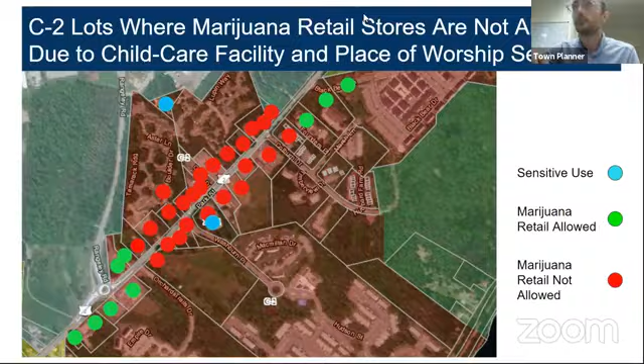Anybody else have questions for Kyle? Kyle, I have a question going back to what Laura was pointing out about that trail over by the Ave. That's university land, correct? So if we look at the 1,000-foot setback, that eliminates those three options down the far Park Street side, correct? So everything would be pretty much out.

Well, it would depend on how you defined it, whether you wanted it to apply to all entrances, a setback from any entrance to campus, whether it's a road or a path. If so, it would probably result in a good chunk of the lots not being eligible, especially combined with the other setbacks from the childcare and the Islamic Center. If you had Rangeley on this side and the path on this side, with the childcare and Islamic Center in between, there wouldn't be a lot of opportunity. But this is all up for discussion, and it's your decision at the end.

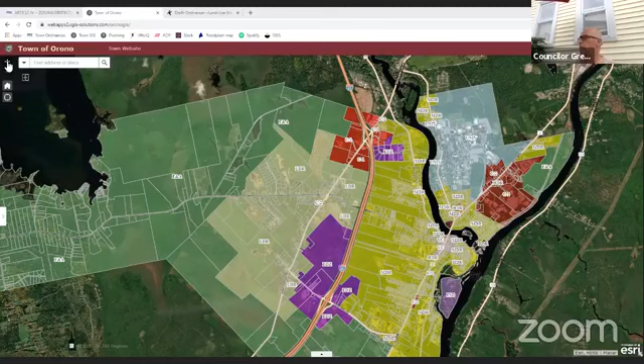Can you see a map? Okay, yes. I've never done the screen sharing with 2 monitors before, so...

So you can see there the beige coloring, which is the low density district. Stillwater Ave is a big corridor that runs through, and it also goes out towards the Forest and Agriculture District along Forest Ave. It turns into the Commercial 1 district as you get towards the shopping center and things like that. It pretty much stays low density residential almost until you get to the town line moving into Bangor.

So that's generally a larger district, worth mentioning. The low density district has fairly large lots, a minimum lot size of 60,000 square feet. So while there are some single family home residential subdivisions in the low density district, they are larger lots than you'd find in the MDR district, for instance.

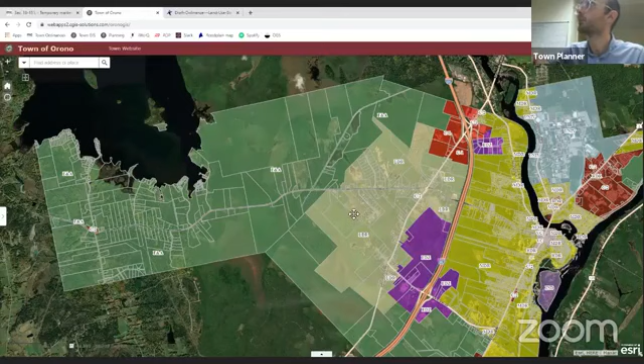To zoom out pretty far to get the whole forest and agriculture district there. But the forest and agriculture district is all the green, so primarily the area west of the interstate, as you get away from the low density district and move out towards the lake. There's a lot of large parcels that are undeveloped and will probably continue to be undeveloped in the forest and agriculture district, but you do get some more residential properties as you move out towards the lake. And then our C1 district, you can kind of see here, which is the area around the interstate exit on Stillwater Ave.

Any other questions, Kyle? The nurseries, would they require all the ventilation? Because that's not really an odor issue when the plants haven't matured. So do they have regulations around those kinds of things as well?

I'm not sure exactly what the state law requires them to submit. I imagine at the very least they'd have to have some sort of plan in place that states they're not going to have any odors go past the property line. It might not be as strict as specifying certain ventilation technologies be used to mitigate it. It might be more so just stating that you won't create an odor issue. But I do think the concerns would probably be less than one of these 5,000 to 7,000 square foot cultivation operations with all mature plants and things like that. It's primarily a greenhouse that might sell gardening supplies.

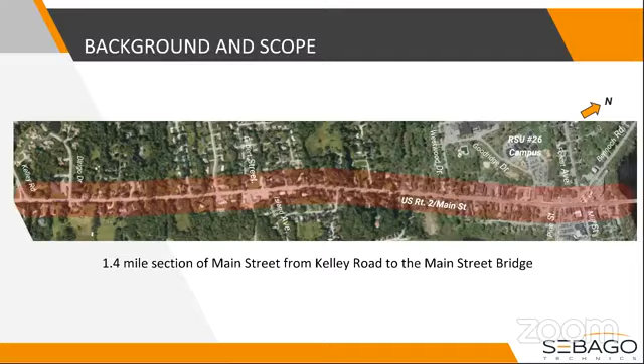So to start, a little background on the project. This really started back in 2017 through a downtown traffic and circulation study that Sebago Technics was commissioned by the town to do at the time. It's important to note that this study really just looked at the downtown area. If you look back at this previous graphic, the downtown study went from Westwood Drive through the signals and didn't look at a majority of this corridor, but it was still an important planning study, and a lot of recommendations came out of it that we tried to incorporate into this project.

Within that study, a number of items were determined, some short-term to medium-term recommendations, and a few long-term considerations. A couple of items I want to focus on: some key elements include a reduction of the travel lanes. What you have out there today is right around 12 feet. Reduction of the travel lanes to 11 feet, and in some immediate areas 10.5 feet, mostly in the downtown area, was what was recommended. The reason for that is twofold.

It's traffic calming and also to try to provide some more space for bicyclists. Moving through the list, there were some minor adjustments recommended for the main Pine Street traffic signal. A big focus, you'll hear me talk a lot about this tonight, is location of crosswalks—both consolidating crosswalks where appropriate, in some cases eliminating them, but more important than either of those elements is really careful consideration of where crosswalks are going to be placed.

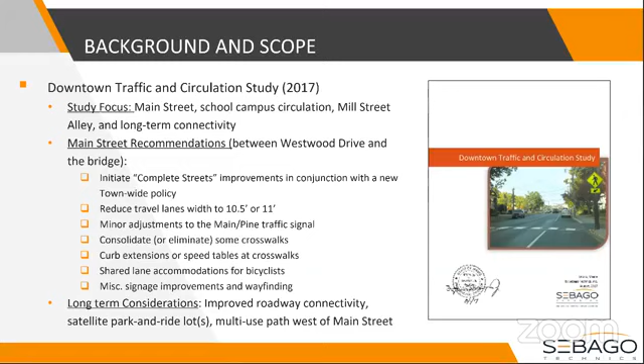What dovetails nicely into crosswalks, in addition to the placement of them, is the treatment of them. So there was a lot of discussion in this study about curb extensions, speed tables to slow down traffic, and also center median islands for refuge areas. Again, accommodation for bicyclists, and various wayfinding and signage to improve notification to motorists of crosswalks and bicycle facilities.

Another important study done in the past, in addition to that downtown planning study, is the Heads Up campaign, a partnership between Maine DOT and BCM, the Bicycle Coalition of Maine. This study started in 2017 and finished up this year, involving 21 communities, including Orono, which we're discussing today. The focus of that campaign was to do a planning exercise for the region as a whole, hold public meetings, and collect data. Other elements included looking at infrastructure improvements needed for the region and developing programs focused both on education and on enforcement.

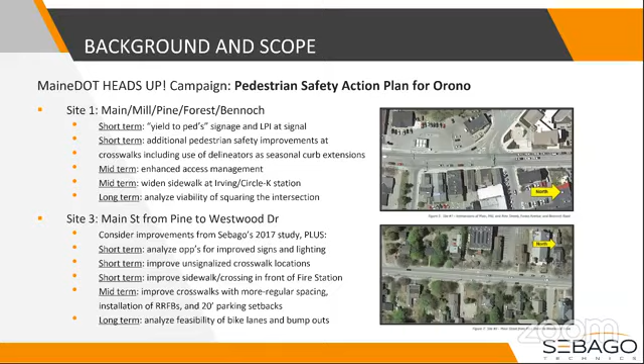So given that background, I'd like to just dive into kind of what we've done to date, and go into the project in a little more detail.

Sebago Technics was competitively selected by the town of Orono, just to set the stage, to really look at some of these options that were recommended, both in the previous planning study, the Heads Up program, among some other materials that were available to us, and allowed us to really kind of look at transforming this corridor. And again, really to look at multimodal focus, multimodal being, you know, I talked a lot about pedestrians, bicyclists,

but also transit in some cases, looking at are there opportunities to provide additional bus stops, opportunities to move bus stops to a safer location, where those bus stops are located, provided safe crossings where those buses are dropping off so people can get from one side of the street to the other. And really looked at the feasibility of implementing these various improvements.

So even given all this information at hand through these previous studies, we found it was really incredibly important to note that Sebago did not perform this work in a vacuum. Yes, Sebago was kind of involved with the 2017 study, but to the town's credit and Rob's group, he encouraged us to kind of interface with the advisory committee.

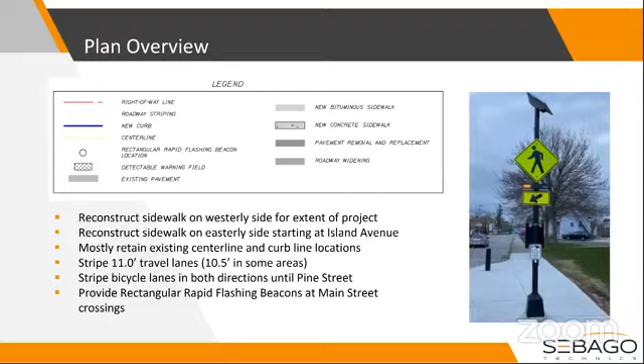What you're looking at here is the overall master plan. This isn't what we're proposing to build day one, but it's the overall vision for the corridor, so it's important you understand the overall context. We're starting at the southerly end of Main Street, with Kelly Road to the left, working right as we go north up Main Street.

Some elements to be aware of: we're proposing to widen Main Street by a couple feet to provide a bike lane between the through and right turn lanes, which transitions to a dedicated bike lane north around Dirigo Drive. Honestly, once you get through the signal that bike lane leads to nowhere, but there's a sizable shoulder there. There's space, but we have to draw the limits somewhere, so there's a dedicated bike lane between those travel lanes.

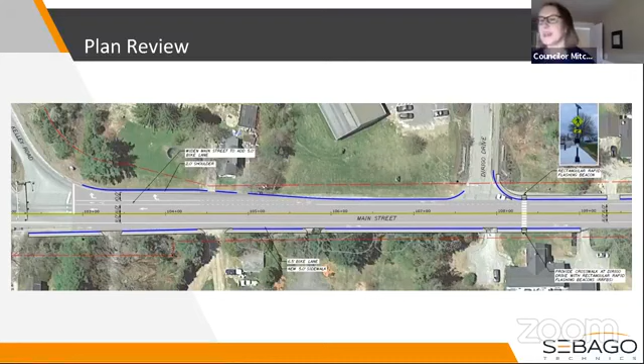I mean, there was a lot of discussion around it, whether you provide sidewalk or not, what side of the road does it go on. There was a lot of back and forth, and we had a lot of differing opinions, certainly at the advisory committee level.

Brad, to also add to that, I do know of a couple people who live in Dirigo Pines that walk up to the country club to eat there, and they have concerns about walking to get to the country club because it's so close to them to eat. Sure.

Thank you. You're welcome. The graphic's not great, but again, all crosswalks, as I referenced on the previous slide, would be treated with rectangular rapid flashing beacons, to draw attention to that crosswalk location, if that was to move forward. But like Rob mentioned, that's not part of the phase one plan.

So moving northerly, vicinity of Willow Ave, not a lot to talk about in this area, to be honest. It's a pretty typical section, downsizing the travel lanes from 12 to 11, with reconstructed sidewalk on the westerly side of the road, if you can see that. That blue line represents that slip form concrete I spoke of.

I think that's pretty much it. Dedicated bike lane, it's important to note, obviously continues through the corridor, defined 5 feet in width, heading southbound. And northbound, since we've kind of lost that sidewalk at Dirigo through that crosswalk, we're not continuing a sidewalk on the easterly side. So your conditions there are basically as they exist today, you're really just talking about striping. Which in turn, if you have a defined 11-foot travel lane, you've got a variable width bike lane, but we've ensured that that's 5 feet minimum.

This is where it starts to get a little interesting. Continuing up to Gilbert Street, the cross section's exactly the same, 11-foot travel lanes. The bike lane gets a little bit wider, 5.5 feet, but for all intents and purposes, dedicated bike lanes both directions, with reconstructed sidewalk on the westerly side.

We had a lot of talk about this. In the area of Gilbert Street, I'm sure you guys are familiar with this. There was a lot of talk about providing a crosswalk somewhere on this corridor, and a lot of need identified for it. We looked at providing a crosswalk not at the intersection of Gilbert, but moving it towards Island Ave. The concern there, for those of you familiar with the road, is you have a pretty significant crest curve, a vertical curve in the road that has the potential to restrict sight distance. So that did not seem like a great location to put a crosswalk across Main Street, which is what's the driver for it being at Gilbert Street. That's why it's located where it is.

The other element of note where you see a lot of line work happening is in the area of this convenience store. For those familiar, that's kind of a sea of pavement. So one of the recommendations that came out, mostly from the Heads Up program but also talked about at the advisory committee level, was the need for access management in this area. This will involve Rob and the town of Orono communicating with the property owner to see what's possible here. But from a traffic engineering perspective, especially given the location of these side streets, it seems like a pretty dangerous condition, not only for vehicles going in and out of the convenience store, but also for pedestrians who choose to walk here.

So Island Ave is kind of cut off, to my left. Continuing to the north, the curb line is being pushed towards the center line a little bit, so the new sidewalk is being constructed on the easterly side of the road. By pushing towards the center line, the width of Main Street curb to curb gets a little narrower. The benefit from that is both from a traffic calming standpoint and it provides a little more pedestrian space if needed. But again, 11-foot travel lanes, which are 100% within standard, with dedicated striped bike lanes in either direction.

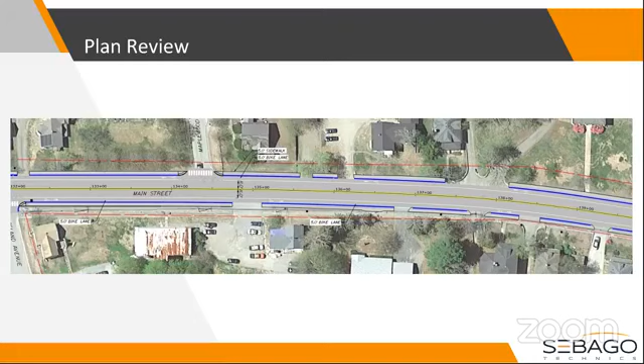Moving to the north, you start to see we have a lot of width available here, just the existing curb to curb. So there were a number of options we looked at in this area. Number one was to consider continuing the cross section I spoke of earlier with 11-foot travel lanes and a 5-foot bike lane. Doing that would involve pulling the curb again towards the road and narrowing it, which proved to be pretty cost prohibitive, both from a construction standpoint and mostly from a drainage perspective. So we thought there was a benefit in changing the striping a little bit, since striping is pretty cheap in the grand scheme of things, and providing a dedicated 2-foot buffer. So that bike lane is really about 7 feet from the fog line, or edge of travel way, to the curb line, with that buffer there to try to separate bicyclists from moving vehicles.

You'll also see another element of note on the easterly side of Main Street as you get towards Spencer Street. The sidewalk gets a little wider, about 8 feet wide. And then we are proposing another crosswalk, similar treatment with an RRFB, in the vicinity of Spencer Street.

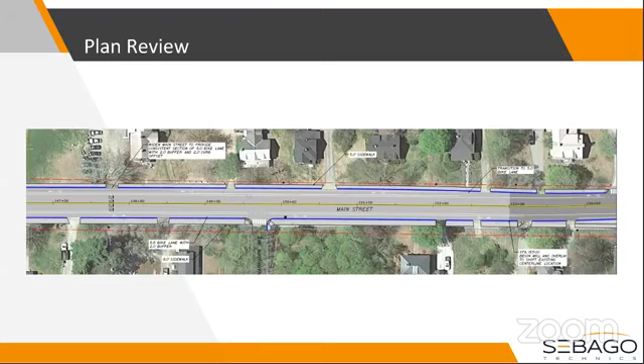Again, similar cross section, nothing to really talk about here - 2-foot buffer, 5-foot bike lanes. You start to see, and probably the next slide is a little better representation of this, around station 153, where that gray gets a little darker. That's where we're proposing a mill and overlay. All of these treatments, and what we're proposing from this area south, is that the core of the road really is not going to be repaved. It's not going to be mill and overlay, it's not going to be reclaimed. So you're really just talking a striping exercise from curb to curb, and then obviously providing your pedestrian infrastructure.

The method of construction starts to change as we get to the north of 153, as you'll see here.

So a lot going on with this plan. Westwood Drive, so obviously in the vicinity of the school. Lot of discussion in this area.

The need for the mill and overlay, in our opinion—it's probably incredibly difficult for you guys to see it, but there's a lightly dashed gray line which represents the existing center of the road today. So in order for us to create enough space to accommodate both vehicles in the road, dedicated bike lanes, and sidewalks, we had to shift the center line to the westerly side by a couple feet. What ends up happening is the crown of the road then ends up being more or less in the middle of that proposed travel way, which is why we're proposing to mill and overlay it—to move the crown of the road to that new proposed center line.

So that's it, Brad—sorry. No, you're good. What's a mill and overlay? Like you're just repaving over?

Yeah, when we say mill and overlay, the depth could be variable. I'm not sure what Rob prefers, but for sake of discussion let me clarify: when we say mill, we're talking about actually coming in and grinding the surface of the pavement away. And the reason we need to grind it away is because we're changing the pitch of the road—the crown of the road is constructed. Roads are crowned at the center, and you need that center line to be the middle of the two travel lanes, primarily for winter maintenance, so we can effectively plow the roads without having to fight the changes of grade with the crown. So moving the center line is the reason why we need to do the mill.

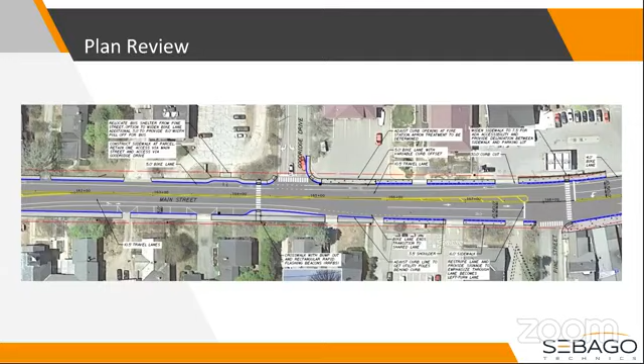The one item we're looking to do here, actually I should go back real quick. You'll see as you get north of Goodridge Drive, heading northbound, that dedicated bike lane turns into a shared lane with vehicles, and that shared lane continues towards the bridge. That's just a function of the available width we have.

So travel lanes are being narrowed to 10.5 feet, southbound direction, bike lanes being provided. It's at a minimum width of 4 feet. We're doing everything we can to squeeze it in there.

The idea for the dedicated bike lane in one direction over the other is really for traffic or bicyclists heading southbound. There's a pretty significant grade, and those bicyclists that choose to ride in the travel lane, it's going to take them a while to get up to speed. So providing them their own space in that direction is preferential over providing it northbound.

Can I interject one more time on that? Absolutely, you're fine. The dotted white line is the intention for the bikes going up the hill there. Yeah, I should have spoken to that. Is that going to be painted, or is that just for us to see where it is? That would be painted. All right, great, thank you.

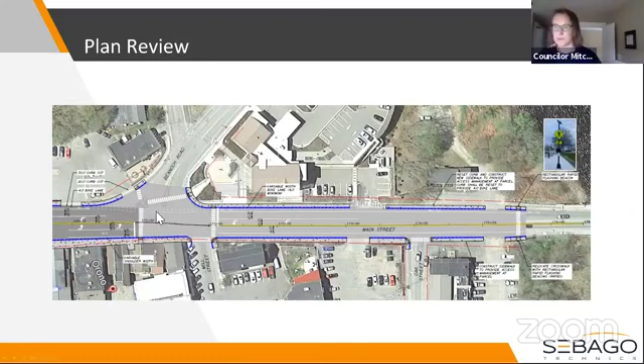And there's a number of treatments for that. Right now it's just white dash. Some communities will do green paint in there to really differentiate it in the middle of intersections, but that's just striping.

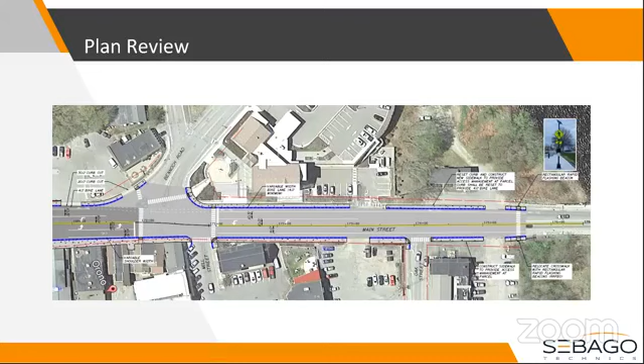The last element of the project here that I skipped over is another crosswalk in the vicinity of Marsh Island and near the trail network there. So we're providing a new crosswalk with RRFBs in that vicinity, and that replaces the awkward, long one that's on a skew that comes out there from Oak Street.

I'm really going to skip this slide because I covered a lot of it. This just covers some of the goals of the project, and I think we've kind of beaten that to death here. Again, it's providing pedestrian space, dedicated bike lanes, getting the corridor up to compliance for ADA, and traffic calming.

So that plan I just presented to you, that's the overall plan. And I always hesitate to give numbers at this juncture because it's all a function of when a project gets built and there's a number of factors at play. But a high level estimate for that work you saw is in the magnitude of about a $2 million project.

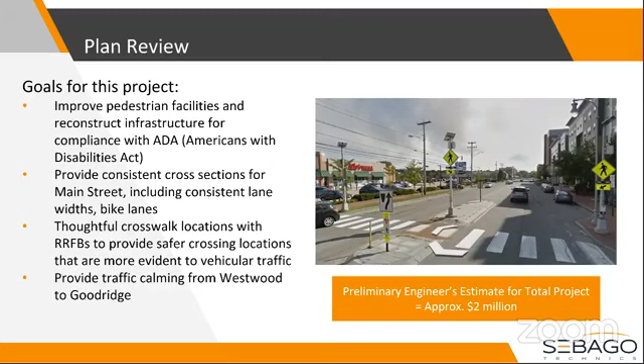And I'll say at this point, council's allocated about 500,000 to this project. And we've been able to get some funding through the Heads Up program that builds our budget to roughly around 650.

So with that in mind, sorry, go ahead Rob. Obviously we had to think of ways that we could step back and prioritize elements of the full build out to fit our budget, to get the most impact, the most positive impact, as quick as we could with the funding that we had available.

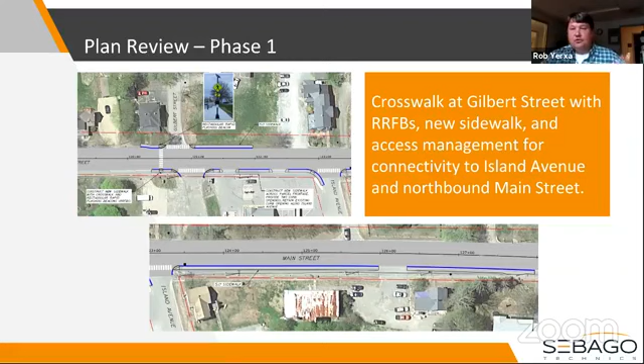So Brad and I worked through all the elements that were there and have come up with this solution to try to prioritize what elements of the build out could be done without necessarily compromising the full build out, thinking that could be done in future phases as we move through the years.

So with that in mind, this phase one plan really keeps that budget in mind, that $500,000 to $600,000. We're taking elements of that overall plan and implementing them, focusing on the crosswalk locations you saw. So it's really being thoughtful about the crosswalks we're putting in place, rebuilding the sidewalks you see here. The scope of work is exactly the same as what you saw in the overall plan.

It's just a section of that plan being implemented in phase one. So we've been really careful to make sure that what's being done in phase one, if the overall master plan was to move forward, isn't at risk of being rebuilt, if that makes sense.

So we're really keeping an eye towards that. You'll see some elements, maybe you're asking why didn't you continue the sidewalk down a certain area. Well, either we have to move the center line, or it was just cost prohibitive to try to keep within that $500,000 to $600,000 range.

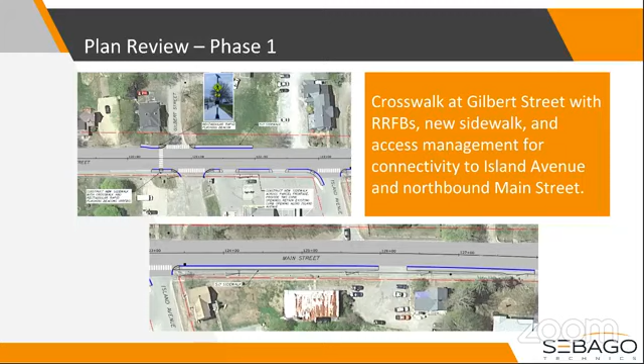So what we propose, all those improvements in the vicinity of Gilbert Street, that crosswalk, that access management, would be done. Continuing to the north, that sidewalk we're providing on the easterly side of the road and moving that curb in to try to narrow the road a little bit would be provided.

Continuing up to Spencer Street, again, not a lot happening there, but provide that crosswalk, get that sidewalk treatment in there, get that all up to ADA compliance, that would be completed.

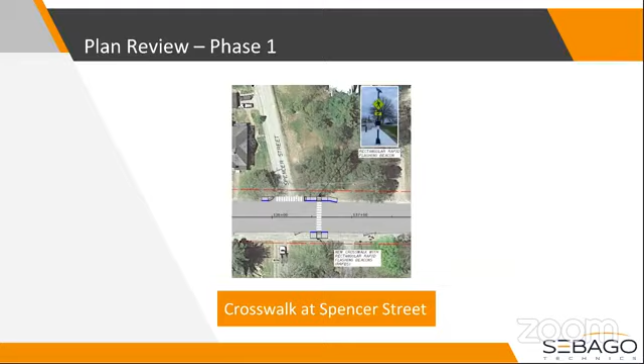Continuing up towards the school, we thought it was very important that we focus on this area since the Heads Up program identified this area as priority number one for Orono as a whole, and we had a lot of information to go off of both on that and the downtown study.

So you'll see that crosswalk treatment we spoke of earlier would be provided. Center median islands, both for traffic calming and pedestrian refuge, would be provided as well.

Working up towards Goodridge, again, some of that access management, if we can get to an agreement with the owner of that parcel that we move forward, that would be conducted. The bus shelter, the bus pull-off, that would be constructed.

One element I didn't mention, it's a really minor detail, but at Goodridge Drive, in the center of your screen, the fire station is just to the north of that. Access management was talked about, but obviously we don't want to restrict fire trucks going in and out of there or any other emergency vehicles. So there would just be a concrete band differentiating the vehicular space from the pedestrian space, but it would be completely rideable. Traffic can go right over it, but it just provides that visual barrier between the two.

So it really goes from Goodridge, and then Sebago will work with Rob and his group on some signal improvements, implementing the LPI that I spoke of earlier. We think that's important. That's not really shown on this plan because it's not necessarily a quote unquote infrastructure improvement—it's a signal timing adjustment.

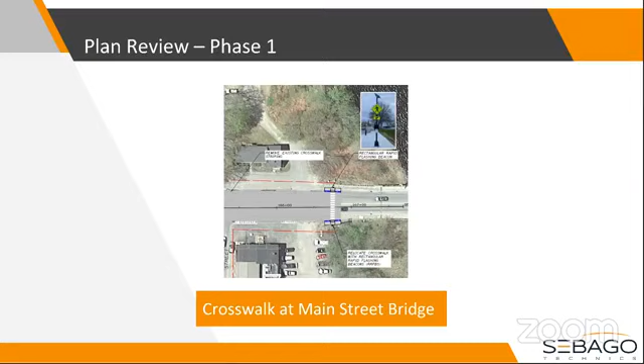So really the next thing would be providing the crosswalk down towards Marsh Island, as we talked about with the RRFBs. Important to note, in phase one there really wouldn't be any dedicated bike lanes striped at this time because the corridor width would be inconsistent. So phase one really focuses on crosswalk locations, crosswalk treatments, and then at those crosswalk locations, providing the RRFBs.

With that being said, there's a lot there. I appreciate your patience. Be happy to open up to discussion. So does anybody have anything for Brad?

Oops, I'm sorry, I realized my video was off here. Sorry about that. So I think something I wanted to emphasize is that while we knew that the project, the overall build, was obviously going to exceed our allocated funds, we felt like it was important to work with the advisory committee to create a full build-out concept so that we wouldn't be making improvements in one area without thought of how that would work and how that would fit in with the other pieces of the puzzle.

So yes, the budget for the full build-out is extensive. But we feel like prioritizing the pedestrian crossings and getting those ADA improvements taken care of as soon as we can has got to be the priority for the phase one work. And then obviously keep digging for funds—we've got another application in at this time with the Senate budget process to try to perhaps get this thing funded. But obviously we'll have to get a little creative with our funding sources as we move forward. But I think this is kind of the best we can do given the resources we've been allocated.

The full build out shows dedicated parking spaces in areas where they're appropriate, primarily on the east side of Main Street. And they eliminate, how many did we end up with, Brad? In the final condition we had 9. Where now, if you lined up the cars on Main Street, ignoring crosswalks and driveways, you can get 15 or 20 in there right now. But by doing that, those parked cars create some pretty unsafe circumstances that this project is working to address.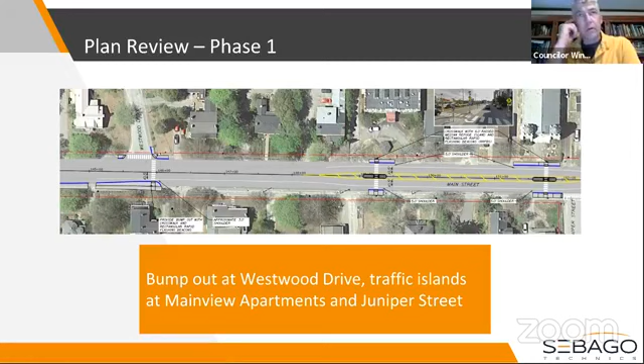Any other questions people have? Well, yep, I had a comment. We heard several weeks ago from our community transit partners about the relocation of some of their bus stops, potential relocation in the future. I was just wondering if Rob could speak to whether there's been any communication with them or how we would adapt to them putting in different stops.

Yeah, so I'm part of that group that's working on that, so I've been talking to myself a lot. But yeah, that will be part of the discussion coming up soon. We'll be talking about working in on the selection process of where the bus stops will go, but the location that we relocated to will work for that.

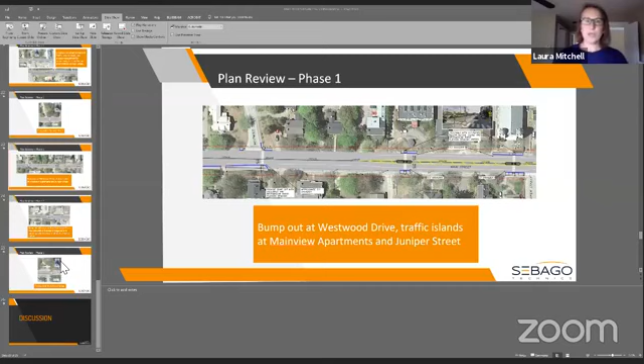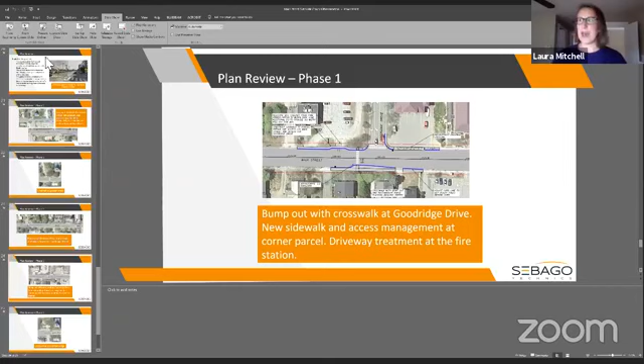I just had some questions about the Goodridge Drive intersection because of a recent pedestrian incident there. I understand things were different this last year with the construction at the schools, but there was a lot of traffic backed up into Main Street from Asa Adams, and my understanding is that it's always been an issue there. So regardless of phasing, we're not doing a ton at that intersection. Do we feel like we're effectively addressing a comparatively heavily used intersection compared to some of the others we're doing?

I would say we're probably doing more at Goodridge than any other intersection in the project in phase 1. We're adding that extra crosswalk, which will have rapid flashing beacons, so it'll have that press button option for pedestrians to walk across on the Main Street side. Right now it's just a striped line on the corner on the fire station side, and we're adding that flush curb there, which will create a little bit better of a refuge for pedestrians too. So there's quite a bit going on right there.

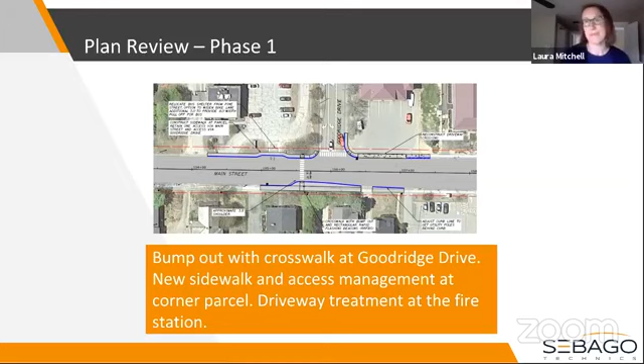Anybody else have questions, comments? Well, first and foremost for me, Brad, thank you so much for doing this. I also want to say I wasn't nearly as engaged as Rob, and when I was in a meeting with the citizens, they really thought this through. I'm a bit more partial because I'm a biker, so I've gotten more into it, and I get concerned about getting hit a lot. So these little things, and to listen to citizens who have the same kind of concerns, because we are a pretty healthy community. So Rob, thank you, because I think you've done an amazing job with this, and the people you had on the committee were amazing. I get why the whole thing is created as a whole, and you pick away at it. We'll get there, it's not going to happen overnight. But I want the councilors to know that you were pretty amazing and committed to making sure this process is getting through. So thank you.

Any more thoughts, questions before I let Brad go?

So as our next steps, if the committee is saying go ahead and move forward with the design of what we've shown you tonight, I'll begin to communicate with members of the affected properties to try to work out some of those access management issues. I'll also be beginning to talk with other interested members of the community on the corridor to give them some information about what the project's going to look like. And then Brad's going to get to work on making this project a reality.